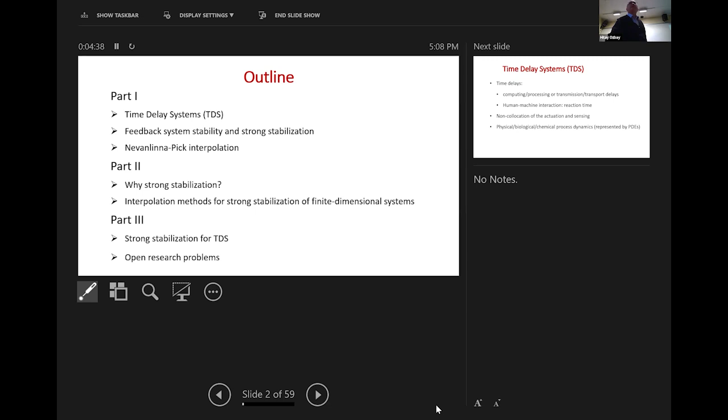Carry on. Okay, so I will talk about Nevanlinna-Pick interpolation, which has been used in the old days of robust control, and how it is used to solve stability and strong stabilization problems. In the second part, I will motivate the strong stabilization problem, and then illustrate interpolation methods for that. In part three, we'll solve the main problem, time delay systems strong stabilization. I'll end with some open research problems that are related.

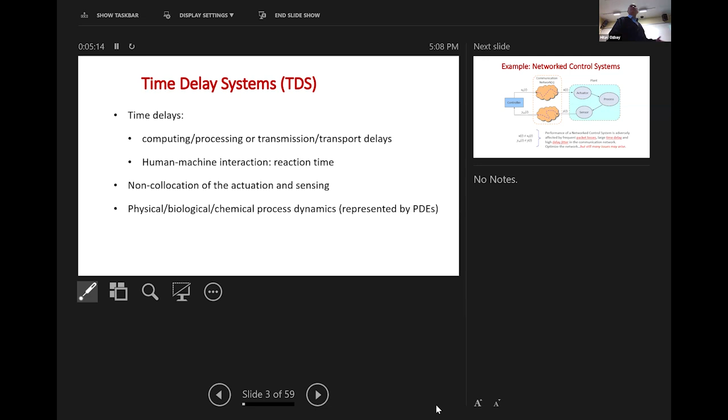Time delays are seen in the physical world all over the place. They come through processing delays, transmission delays, human-machine interaction where human reaction time is slow, and non-collocation of actuation and sensing in physical systems. They appear in many biological, chemical, and physical systems represented typically by partial differential equations.

One typical example is a networked control system, where you have a physical plant here which contains the process, actuator, and sensor, and far away there is a controller. The communication between these two is done through communication networks. So you send the command signal from the controller, and it gets to the physical system through the communication network. This signal U is not exactly equal to UC, and the simplest model of this transmission is a delay, a pure time delay.

There are, of course, other issues involved with communication networks. For example, there may be jitter in the delay, there may be packet losses, quantization, etc.

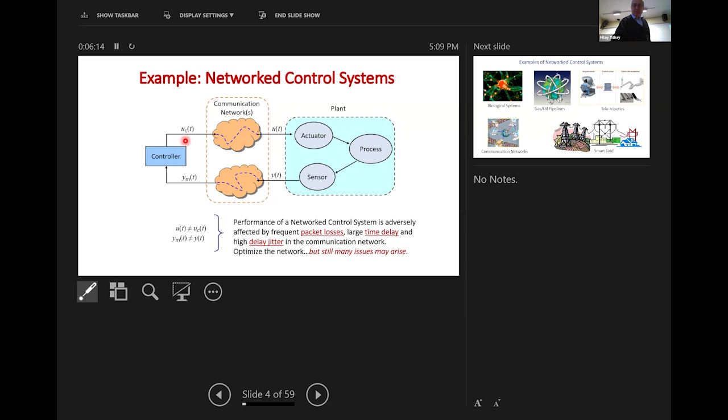Some network control system examples from different applications - I'm just going to skip this since you are all familiar with these kinds of things.

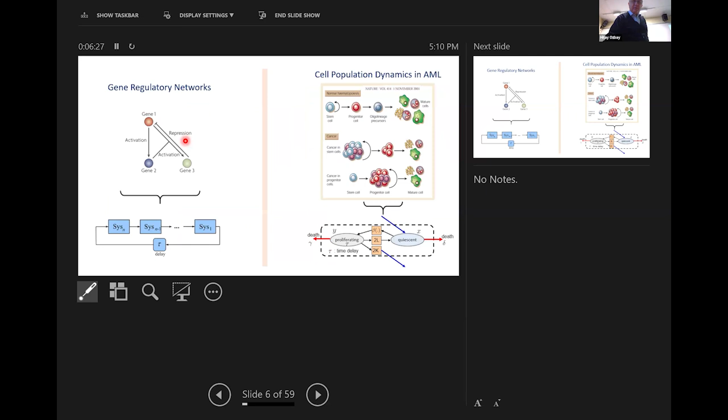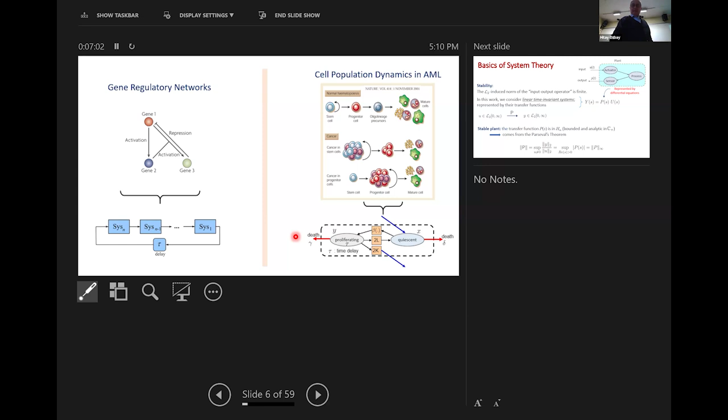Gene regulatory networks also contain time delays. If you model the cell population dynamics in leukemia, for example, there's a famous time delay system model for it. In fact, the very first original paper on biological cell population dynamics came out of McGill University. Mackey, I don't know if you know him, presented that. Okay, let's put everything into perspective.

What do I mean by a system and how do I represent the system? These are the very basics of systems and control theory. Let's say you have a plant. I assume that the plants we are dealing with are linear time invariant. Therefore, the input-output relationship can be represented by the transfer function.

Stability, I define it to be L2 norm, L2 induced norm, boundedness of the L2 induced norm. That brings us to H infinity stability: the transfer function for a system to be stable must be in H infinity - bounded analytic functions in the right half plane. The operator norm is the H infinity norm, actually. In particular, this means that the plant should not have poles in the right half plane.

But if you have time delay systems, infinitely many poles appear, and there are some other technical details.

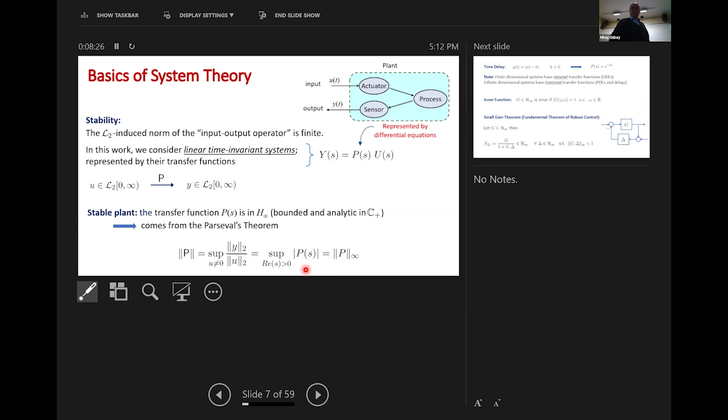So, time delay: if your output is just a constant delayed version of the input, the transfer function is e to the minus hs, by the Laplace transform property. So in this case, you see that an irrational transfer function appears. For finite dimensional systems, the transfer functions are rational - you have finitely many poles and zeros. For infinite dimensional systems, you may have infinitely many poles and zeros.

Throughout the talk, I will mention something called an inner function. We say that a stable transfer function - stability in the sense of H infinity - is inner if its magnitude on the imaginary axis is 1 almost everywhere. Then there is another thing which I use later on, the small gain theorem.

George is looking at us.

He's checking. His picture is over there.

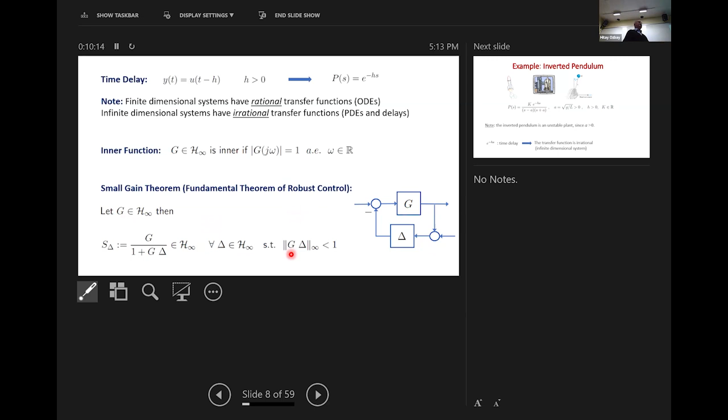So if you have a feedback connection like this, where G is stable and delta is stable, then this feedback connection is stable for all delta stable, such that the infinity norm of G times delta is less than 1. That's called the small gain theorem.

Okay, example of an infinite dimensional or time delay system transfer function: you're trying to balance a stick in your hand. So let's take something here, this one. You're balancing this. What you do is you look with your eyes where the current position is, you get feedback from it, then process it in your brain, and do actuation through your hand.

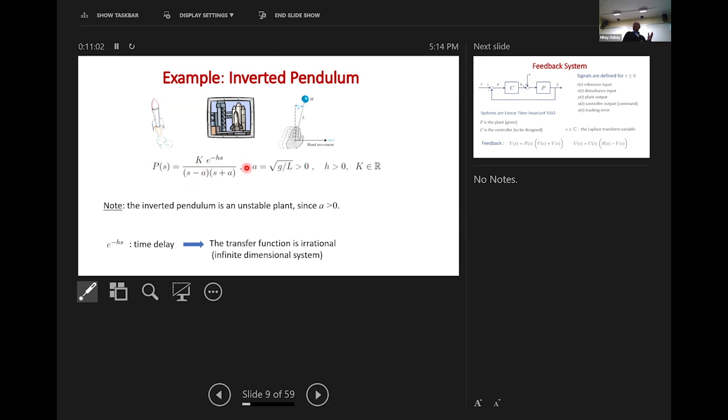So human reaction time is the delay, and the rest is the physical property of an inverted pendulum. It's an unstable system because it has a pole in the right half plane.

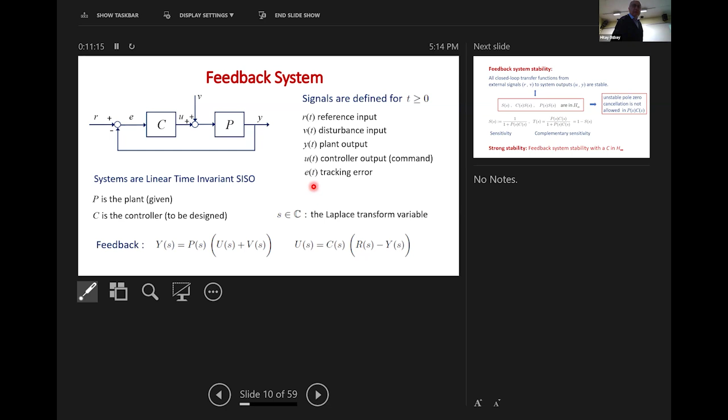Okay, so I already talked about the feedback system connection, but again, stability of the feedback system is equivalent to having all three transfer functions in H infinity: sensitivity, controller times sensitivity, and plant times sensitivity. Obviously, when sensitivity is stable, then 1 minus sensitivity is the complementary sensitivity, so that's the transfer function classically from reference to output, and it's already stable. But you also need controller times sensitivity and plant times sensitivity in H infinity, because if one of them is unstable, then one of the transfer functions will be unstable.

So that is feedback system stability: all transfer functions must be in H infinity. That's equivalent to having one of the transfer functions, let's say S, in H infinity, plus no unstable pole zero cancellation. Strong stability, which is the subject of today's talk, is feedback system stability using stable controllers only. That's the strong stability problem, and later on I will motivate why we are interested in this.

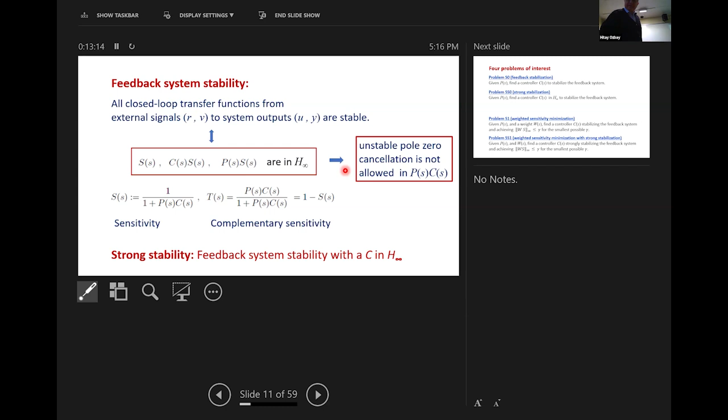So we have four problems of interest. One, S0, feedback system stability. The second problem is SS0, strong stabilization problem, which I have already defined. Then there is also a weighted sensitivity minimization problem, which is feedback system stability plus the H infinity norm minimization of the weighted sensitivity. And the associated strong version of this problem is weighted sensitivity minimization with strongly stabilizing controllers. So there are four problems that will be of interest to us later on.

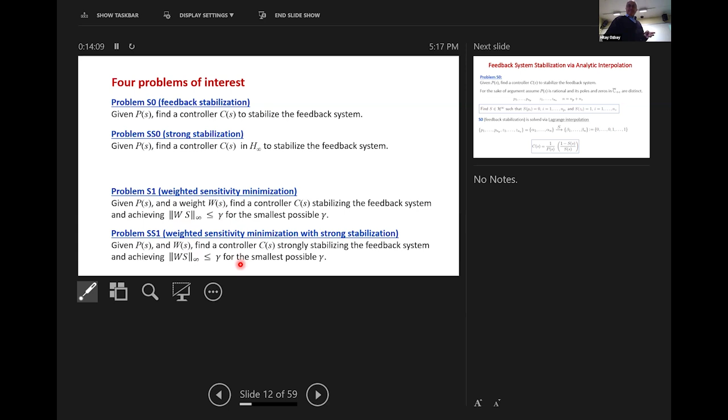So feedback system stabilization can be done by analytic interpolation. Let's say you have a given plant, and you want to find a controller to stabilize the feedback system. For the sake of argument, assume P is rational and its poles and zeros in the extended closed right half plane are given here, with total n poles and zeros, and assume they are distinct. Then feedback system stability is equivalent to finding a function S, the sensitivity function, which is stable, such that S takes certain values at the right half plane poles and zeros.

These interpolation conditions actually correspond to the no unstable pole zero cancellation condition in the plant times controller expression. Sensitivity becomes 0 at the unstable poles of the plant, and sensitivity becomes 1 at the unstable zeros of the plant, so there is no unstable pole zero cancellation. So basically this problem is equivalent to: given some points in the right half plane and their corresponding values, find a stable transfer function which does this job. This is the Lagrange interpolation problem, and it's relatively easy to solve.

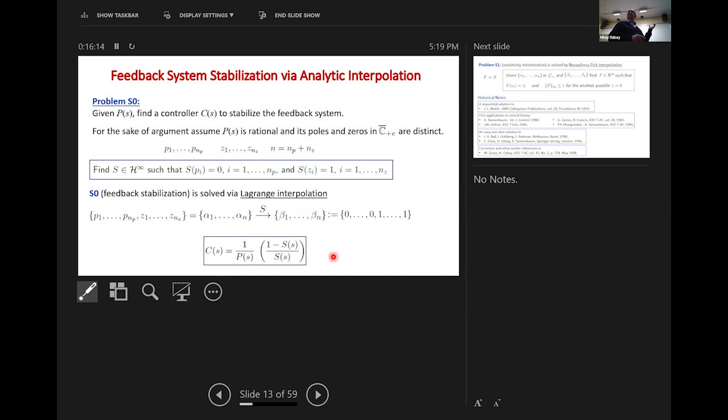Then you construct the controller from the sensitivity that you have constructed this way. This is something that appeared in the 1980s and was forgotten afterwards. This is not what people usually do.

Sensitivity minimization is equivalent to Nevanlinna-Pick interpolation. That is, you have some points in the right half plane and their corresponding values, and you need to find an interpolating function, stable, with the smallest H infinity norm possible.

Historically speaking, the Nevanlinna-Pick solution goes back to an algorithm which appears in Walsh's book. It's a sequential algorithm: you first find the first interpolating function, then use it for the second one and the third one, and so on and so forth, continuing like this. This algorithm has been used in robust control theory, first by my PhD advisor, Allen Tannenbaum, in 1980. Then Bill Helton used it in the circuit theory literature, and Zames and Francis used it to solve the H infinity control problem. And Khargonekar and Tannenbaum later used it to solve other stability margin optimization problems.

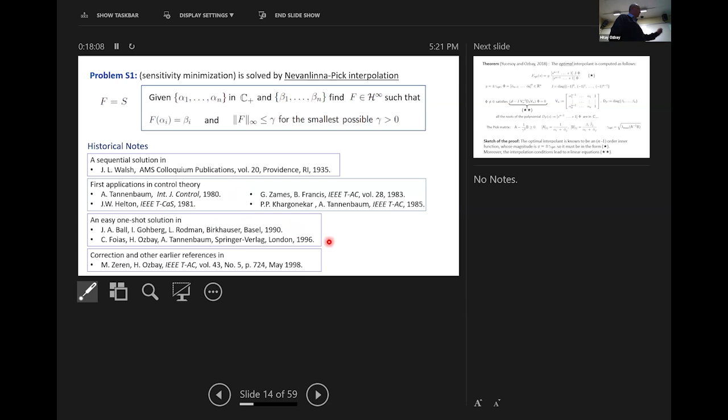But the simplest solution, in my point of view, for the optimal interpolant is in our paper here. I'm not going to spend much time on this, it's just that there exists a simple one-shot solution. So optimal interpolant is an inner function which can be constructed by finding the eigenvalues and eigenvectors of a certain matrix here, this matrix, okay? Let me skip this.

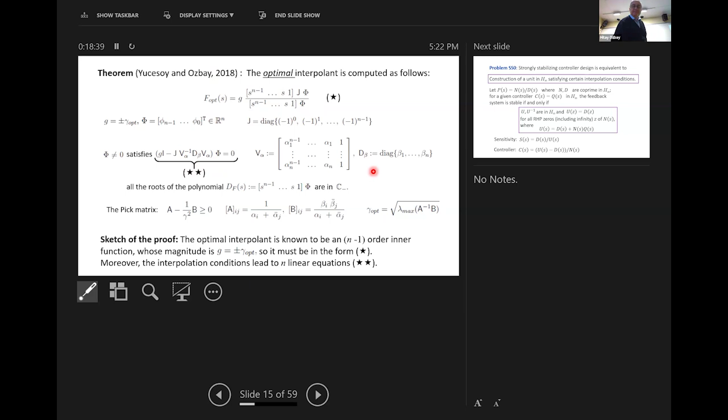Now, so far, problem S0 and S1. So stability and sensitivity minimization we discussed. Now, how about strong stability? Strong stability is equivalent to construction of a unit in H infinity which satisfies certain interpolation conditions. Now, what do I mean by a unit in H infinity? U is a unit in H infinity if it is in H infinity and its inverse is also in H infinity.

Okay, so if we can start with a coprime factorization of the plant in this form, n over d, where n and d are coprime in H infinity, and assume that the controller is Q in H infinity, then the feedback system is stable if and only if this U is a unit in H infinity. And this U, you see when n becomes 0 at a point z, let's say, then U must be equal to d of z. So these are the interpolation conditions for the unit construction, okay? So in this case, once you've constructed such a U, the sensitivity function is this, and the controller is written in this form, okay?

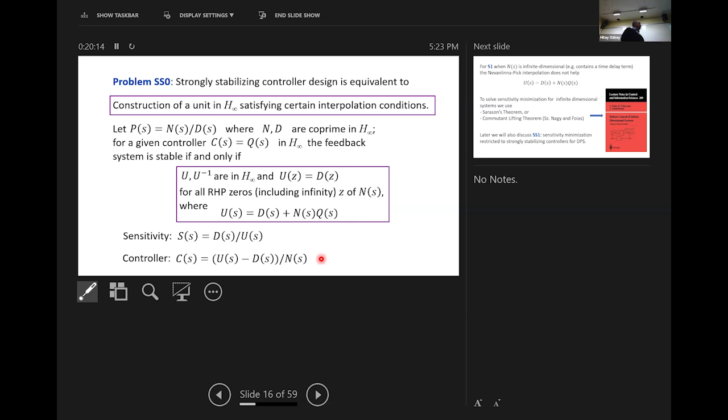One other thing I should mention for the sensitivity minimization problem: when the plant is infinite dimensional, when n contains delays, for example, Nevanlinna-Pick interpolation is not really helpful. So you have to go to other extensions of the interpolations. And for the sensitivity minimization for strongly stabilizing controllers, we'll come to this problem later.

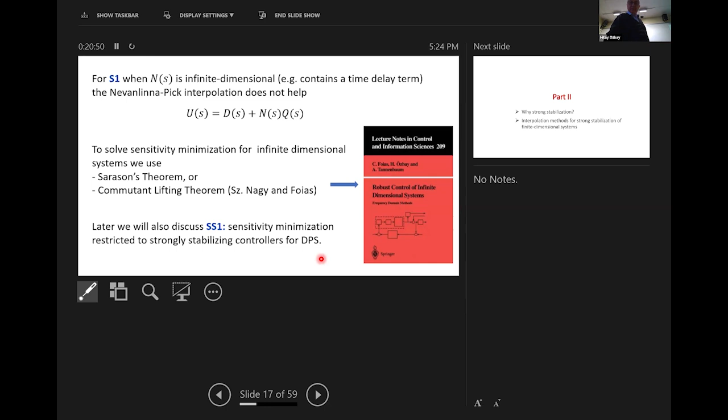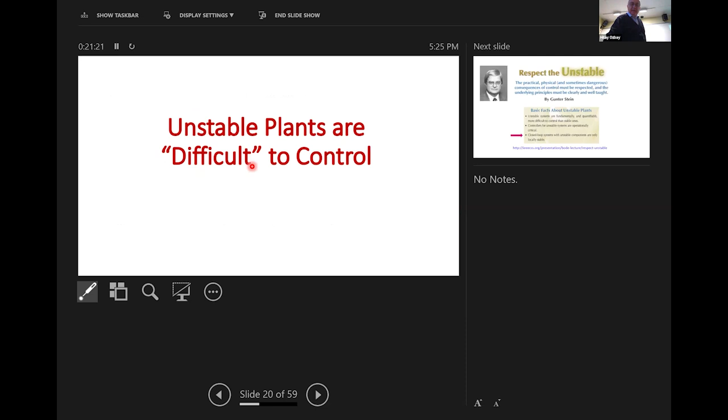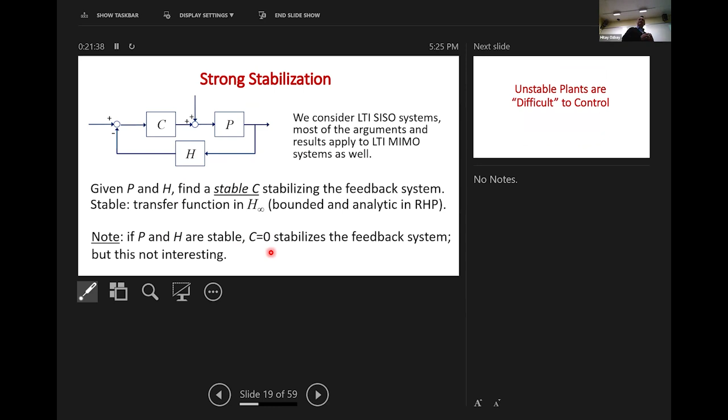Okay, so one important thing is that unstable plants are difficult to control. So if P and H are stable, then choosing C equal to 0 stabilizes the feedback system, but obviously this is trivial and it's not interesting. So the strong stabilization problem becomes more interesting for unstable systems, and unstable systems are difficult to control.

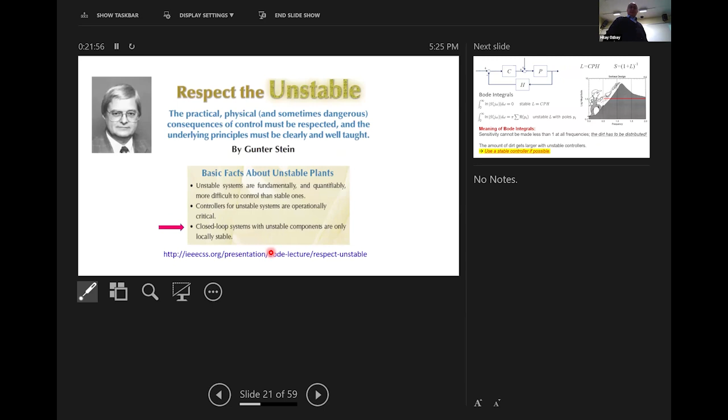So this is the very famous Bode lecture given by Gunter Stein in 1989. And he argues there, using Bode's integral properties, say integral formulas, that if the open loop plant transfer function contains right half plane poles, then what can be achieved in the sensitivity gets worse, okay? So for this reason, you don't want to introduce extra right half plane poles in the open loop transfer function. So use a stable controller if possible.

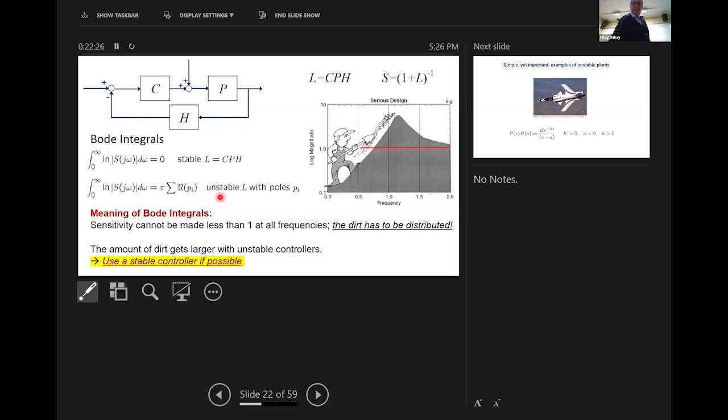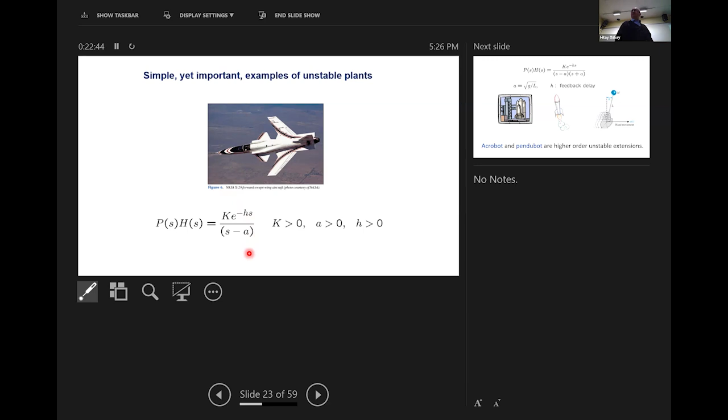Simple yet important examples of unstable systems are like the one shown here, which is an abstract model of an experimental X-29 aircraft. An example I mentioned before, but you also have other interesting problems. If you have two links like this, and then you try to stabilize, that's an acrobot problem. So they have two unstable poles and delays.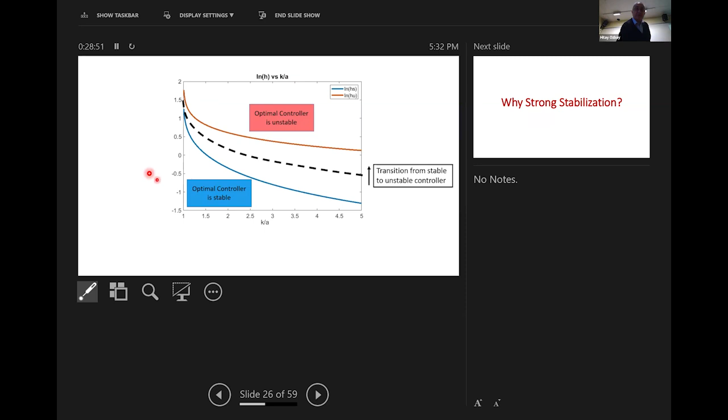And just a clarification here, the result in this plot - is this a feature of time delay? This would happen even without time delay. No, this is a function of time delay. You see this y-axis is the time delay, and x-axis is k over a, so how aggressive you are in your design.

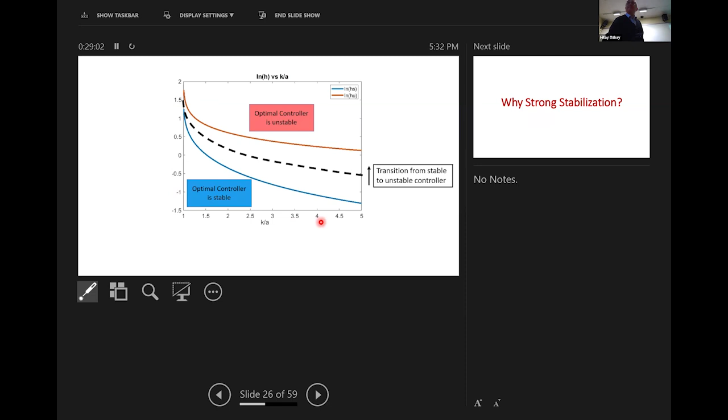Okay, so these are two reasons. And the third reason, which is also very compelling to use stable controllers, is that let's say your sensor is a network here. The output goes to the controller side through a network, and somebody is messing up your network - let's say there's a malicious attack that takes out the network. And suddenly you don't get anything in the measurement signal. So then your system operates in open loop. If you have an unstable controller, the open loop system is unstable, and then you are doomed, right? So that's another important point.

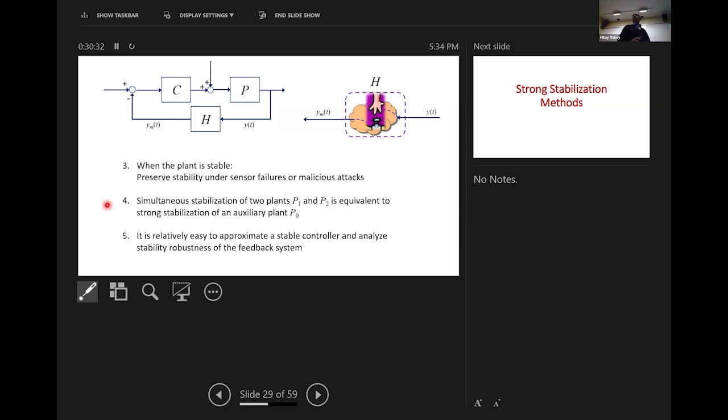And the fourth reason is that simultaneous stabilization of two systems is equivalent to strong stabilization of an auxiliary system. So that's also important. If you have a system where there are two possibilities for your actual physical system, and you want to stabilize both of them, but these are two discrete plants, you do a strong stabilization for an auxiliary plant. Also, when you have a stable controller, it's relatively easy to approximate it. So that's another thing.

Strong stabilization methods - okay, let's talk a little bit about that. So we already know how to stabilize a given plant, right? If you have an nth order plant, you do observer plus state feedback, let's say, and you get at most an nth order stabilizing controller. That's relatively easy. Or you can do Lagrange interpolation, you can again get the same.

But for strong stabilization, you need an extra condition to be able to solve this problem. The extra condition is given by the Youla, Bongiorno and Lu result, which is the parity interlacing property: for every pair of positive real axis zeros, you must have an even number of poles. And the proof is not very difficult to see. When you construct a unit - anyway, let's not go into the proof - but if this number is odd, it means the unit must change sign on the positive real axis, meaning it must have a zero on the real axis, and its inverse is not stable.

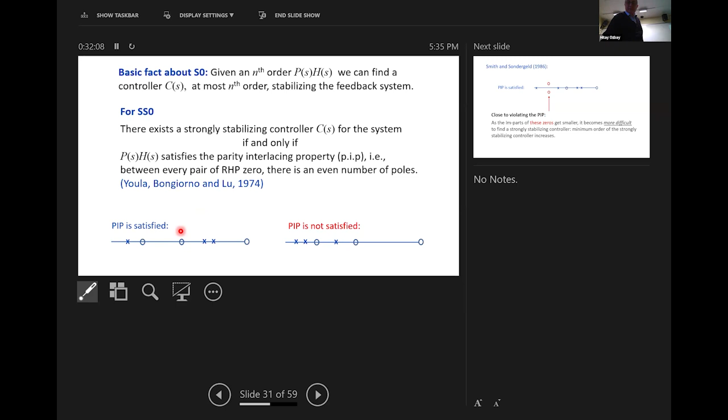On the other hand, the other difficulty is the following: even if the plant satisfies the parity interlacing property, you can find a strongly stabilizing controller theoretically speaking, but there may be some situations depending on the pole zero location. So location now plays an important role, not just the number of pole zeros.

The strongly stabilizing controller order may be extremely high. For example, in this configuration, there are complex conjugate zeros, and as the imaginary part goes to zero, the order of the strongly stabilizing controller goes to infinity. As you can see, when they hit the real axis, the parity interlacing property is being violated, because there will be like one pole. So there is a difficulty associated with this problem.

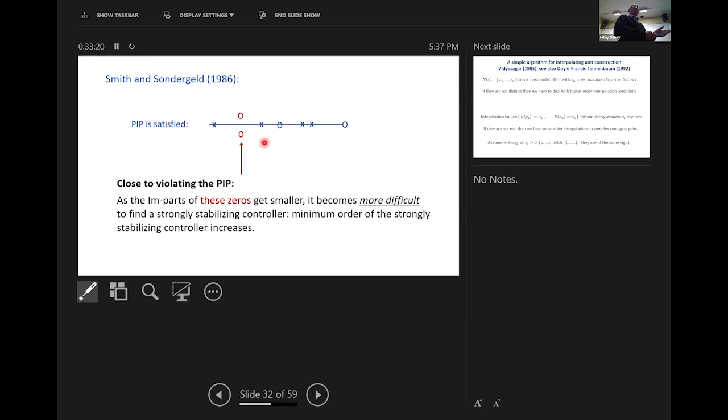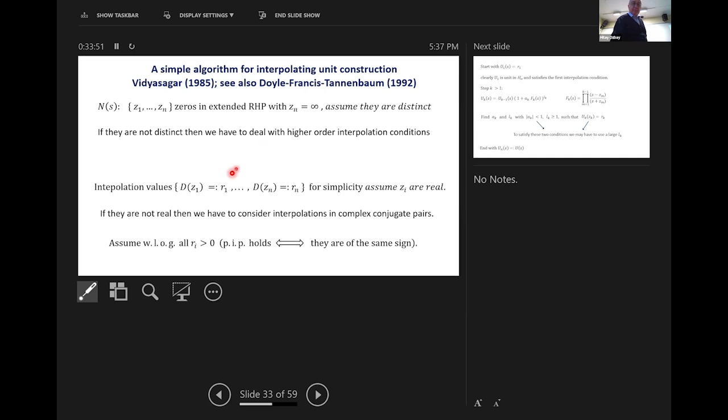One of the first algorithms was given by Youla and his colleagues. It is also repeated in Vidyasagar's book and Doyle, Francis, Tannenbaum's book. I'm not going to go over the technical details of this algorithm, but you try to construct a unit in H infinity from the interpolation conditions. They use the small gain theorem and a sequential way of constructing the interpolating function.

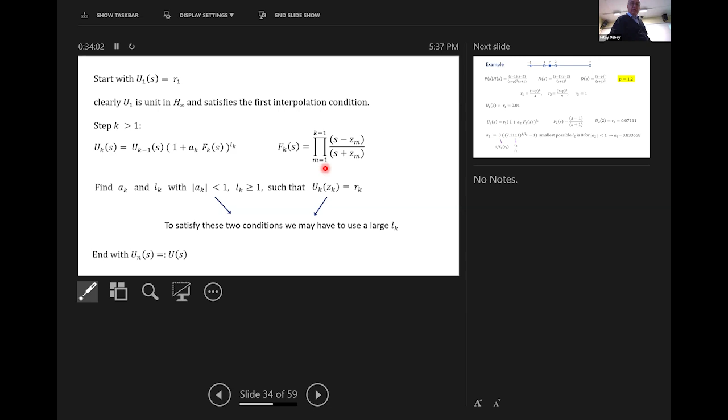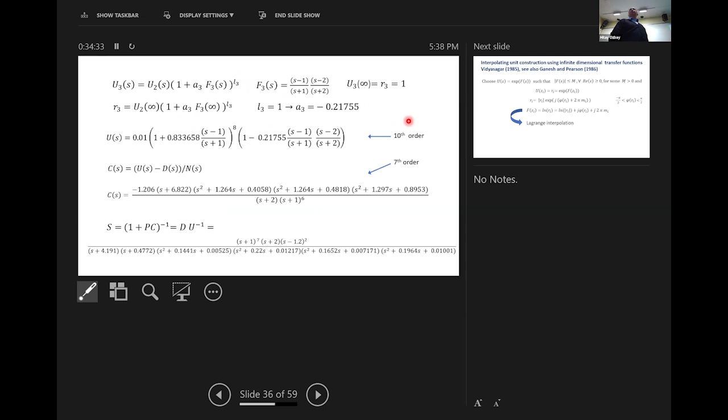So here's an example: a third order plant with a zero at 1 and 2, and also at infinity because this is strictly proper. The right half plane poles are between 1 and 2. For this value, p equal to 1.2, I follow the algorithm and you get a 7th order strongly stabilizing controller. So although you started with a third order plant, you have to go to 7th order to get the strongly stabilizing controller.

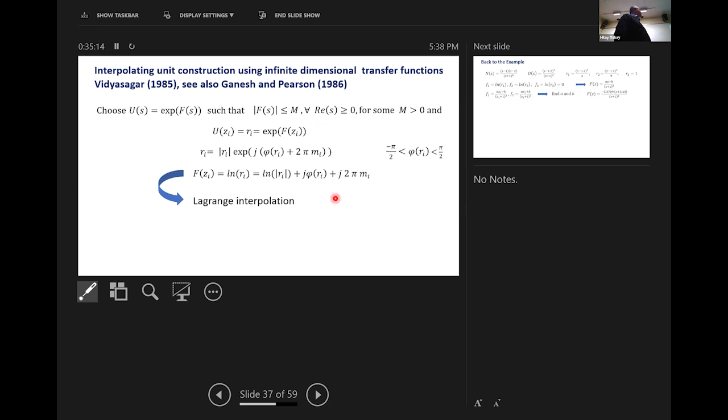And if you allow yourself infinite dimensional controllers, it's easier to solve this problem. So here it is: you can choose your unit as e to the f, where f is in H infinity and f is bounded in the right half plane. So the interpolation conditions lead to Lagrange interpolation for the construction of f.

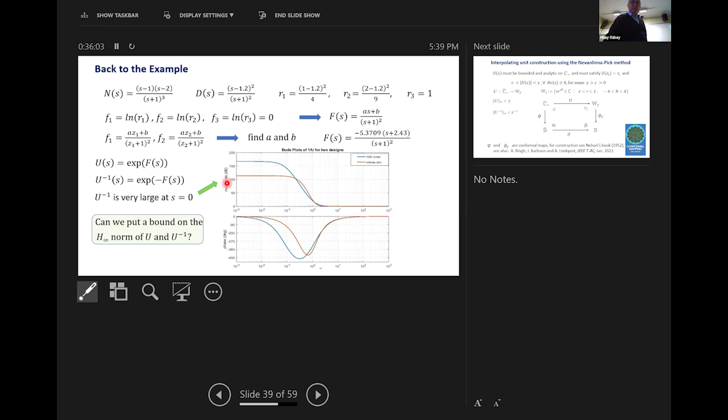Because we only put a bound on the magnitude of u, we did not put a lower bound on that. So you can actually put a lower bound on the magnitude of u, and that means you want your analytic function u to take certain specific values in the right half plane. So map this region, which is a simply connected domain, into the unit disk, map the right half plane to the unit disk, and you want to find an interpolating function from the closed unit disk to the unit disk, which is a Nevanlinna-Pick problem. Again, it can be solved.

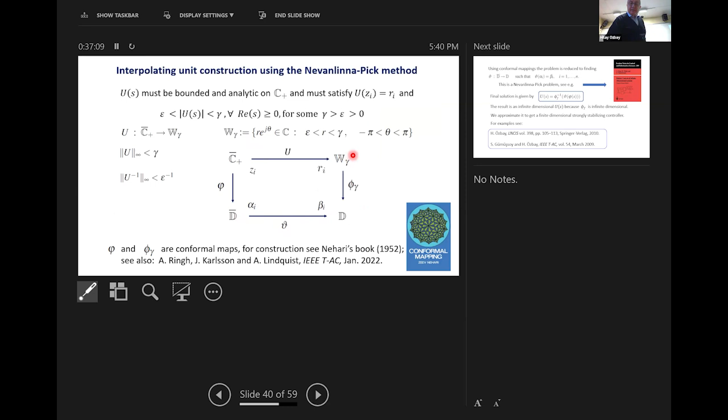But the problem here is finding the conformal map, this one. You can check in Nehari's book. But that map is infinite dimensional. So you are going to get a finite dimensional function here, but going to the other side, you will have an infinite dimensional function.

Now, one of the criticisms for the interpolating methods for controller design is that if I don't know these values exactly, so what happens? If there is a perturbation in the interpolation points, what happens?

So in that case, you look at this problem: let's say this is your true plant, your nominal plant is N over D, and the uncertainties are described by these numerator and denominator perturbations. Let's say W1 and W2 are known stable transfer functions. Their magnitudes on the imaginary axis will tell me how much confidence I have or how much uncertainty there is, and these are normalized to 1.

So you design a U starting from P0 equals N over D. You construct your strongly stabilizing controller that leads to S0 and T0. And if you look at the sensitivity function for the uncertain system with this C0, with this controller, it's this expression, and it is going to be stable by the small gain theorem if this norm is less than 1.

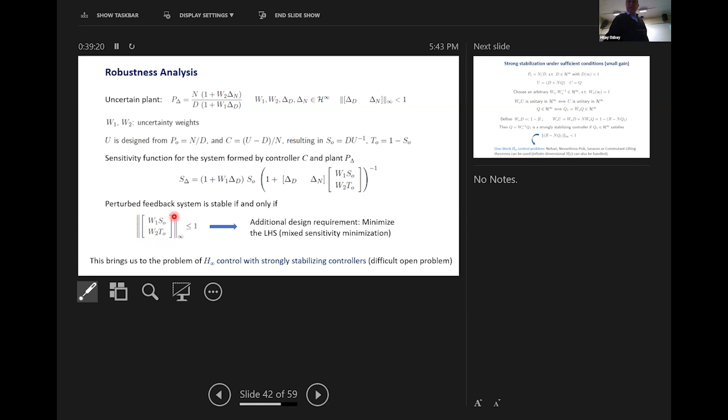There are some bounds for it, but not known. The other approach is strong stabilization under sufficient conditions.

So, P is N over D. Now let's restrict D to have 1 at infinity. I can always do this. This is a normalization, so the value of D at infinity is 1. And I want to construct a unit U in this form. So if I choose W0, an arbitrary unit in H infinity, such that its value at infinity is also 1, then W0 times U is unitary in H infinity if and only if U is unitary in H infinity.

So then let's look at W0 times U, which is this expression here. And it can be written as 1 minus R minus N times Q1, where Q1 is W0 times Q. And R here is 1 minus W0D.

So by the small gain theorem again, if I can find a Q1 such that this norm can be less than 1, then I solve the problem. That gives me my strongly stabilizing controller. But this is a sufficient condition only because I use the small gain theorem. The left-hand side, so this problem, minimizing the left-hand side, is a one-block H infinity problem. We know how to solve it, okay?

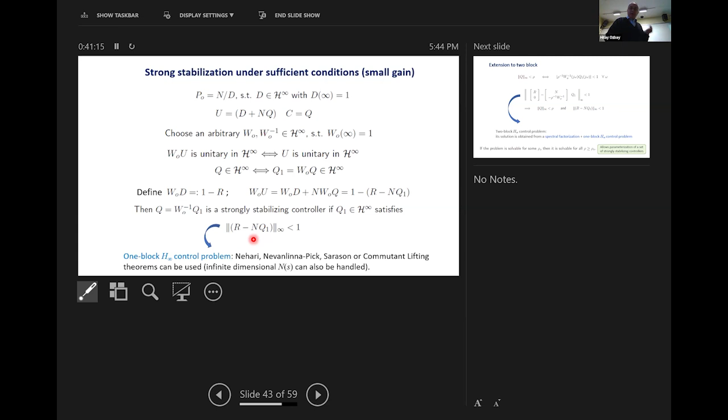Now, if you want to further impose a bound on the controller magnitude, so the controller must be stable, but also its infinity norm must be less than, let's say, rho. Combined with the previous condition, it gives me a two-block H infinity problem to solve. Again, we know how to solve this problem. And so what we are going to do, we will be interested in solving this problem for systems with time delays. I'll give examples of that.

Could you remark about the multivariable versions of this theory? Yeah, exactly. It works exactly the same way.

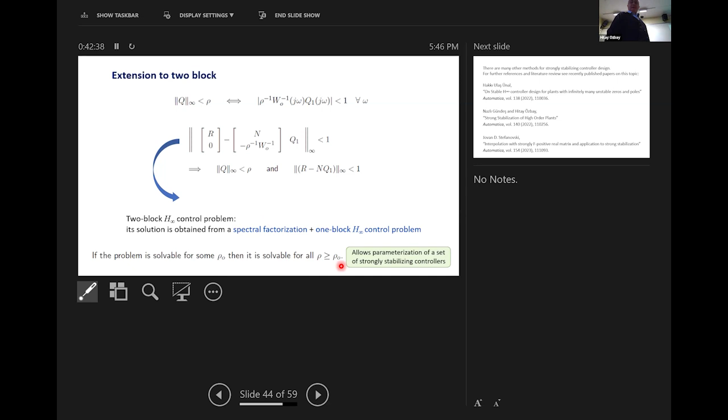Ah, okay, right here. So the original version, which I wrote with my former PhD student, was the multivariable version. I just wrote it in simplest terms here. So the other interesting thing here is that if the problem is solvable for some rho, say rho 0, then it is also solvable for rho greater than rho 0. So that allows us some kind of a parametrization for a set of strongly stabilizing controllers.

So there are other methods for strong stabilization, but I'm not going to talk about them. So, time delay systems. We are going to apply the techniques that we have seen to time delay systems in the remaining 10 minutes or so.

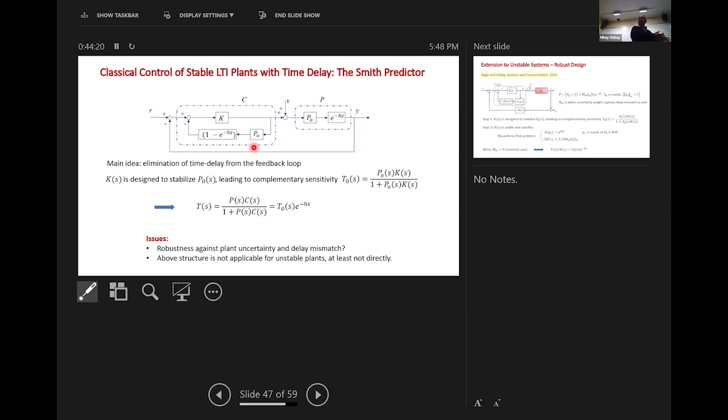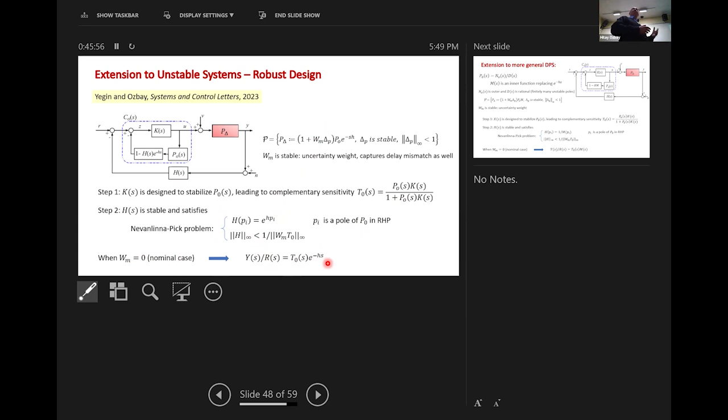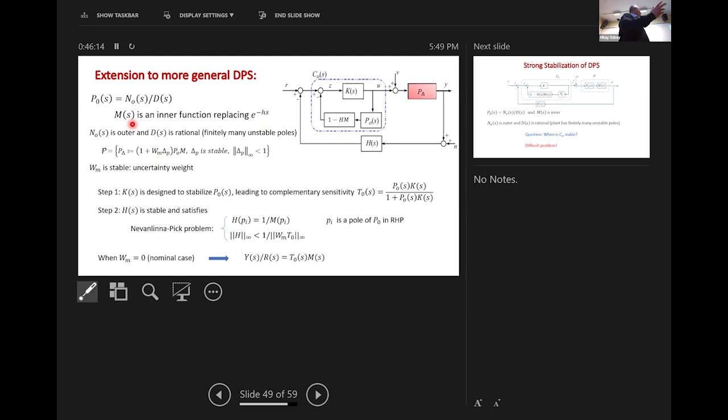So in the nominal case, when the uncertainty is 0, the transfer function you get from the reference to the output is again T0 times the delay, which is really the main idea of the Smith predictor. So that is the extension to unstable plants. More general distributed parameters can be handled in this way. Instead of delay, you can have an arbitrary function, but let's not go there. So this is a small extension of that.

So, okay, that was stabilization. How does it help? Does it help in strong stabilization? So for the strong stabilization, this C0 here has to be stable, because I know H is stable, so C0 must be. So when is this stable? Even when K is strongly stabilizing P0, that loop may not be stable. So that's a hard problem — it's one of the open problems.

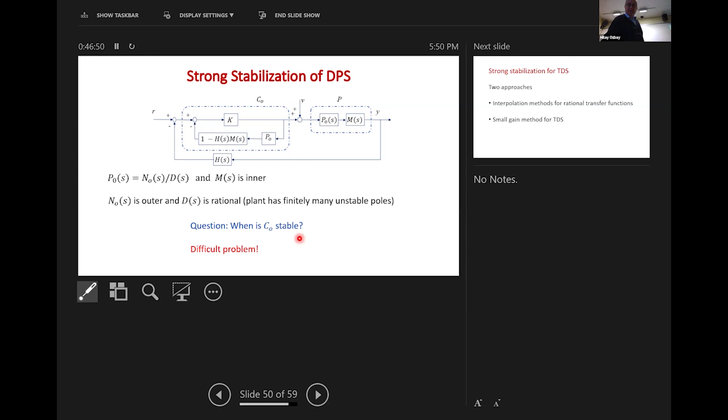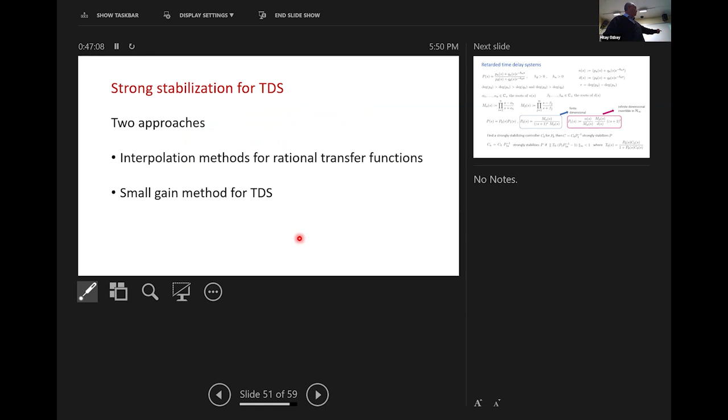The interpolation methods that I showed for rational transfer functions, for strong stabilization, also apply to time delay systems. I'm going to show just one example of that. And the small gain method also applies to time delay systems. I'll show you another example.

So the first example is interpolation methods. You can do a factorization of the plant. This is your plant, a quasi-polynomial divided by another quasi-polynomial. In order to find the right half plane poles and zeros, you have to find the roots of the numerator quasi-polynomial. So these are the roots, these are right half plane zeros, and these are right half plane poles, the roots there.

So in order to find the roots of quasi-polynomials, we use various software packages that exist now.

You can write the plant in this form, P0 times P1, where P0 is finite dimensional and P1 is infinite dimensional, but it is invertible in H infinity. So this part can be ignored essentially, because it can be inverted stably and put inside the controller. So you're only interested in strongly stabilizing this, and you can apply the interpolation method we have seen.

But if you approximate P1 in the controller implementation, then we also need another infinity norm bound condition for stability.

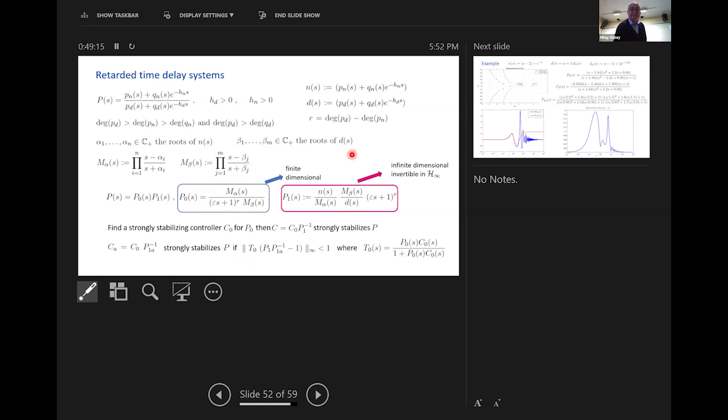So, small gain condition. I can apply the small gain condition that we have seen for time delay systems. In the previous example, our N was finite dimensional, but now for time delay systems, your N will be infinite dimensional. It will contain a time delay, okay?

So we will consider two problems here. SS0: given a plant, find a strongly stabilizing controller using this small gain theorem. And SS1: find a strongly stabilizing controller such that the weighted sensitivity is less than a specified value.

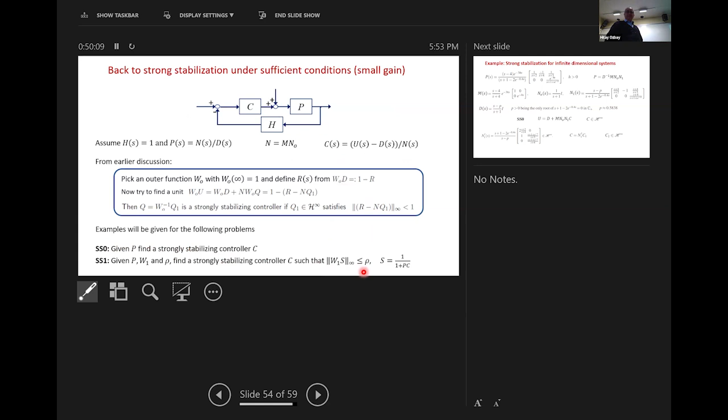So this is the example I take. You see here there is a parameter H. I'm going to leave this delay amount free, okay? So I'm going to see whether I can find a strongly stabilizing controller using the small gain technique for the values of H that are given, for which values of H I can find this solution.

And the one block problem that you get out of it now becomes this. By the way, maybe I should go back and talk about this little p. Little p is the only root of the denominator here in the right half plane, and it is 0.58. So the plant satisfies the parity interlacing property, because this is to the left of the zero, which is 4. And the other zero is at infinity.

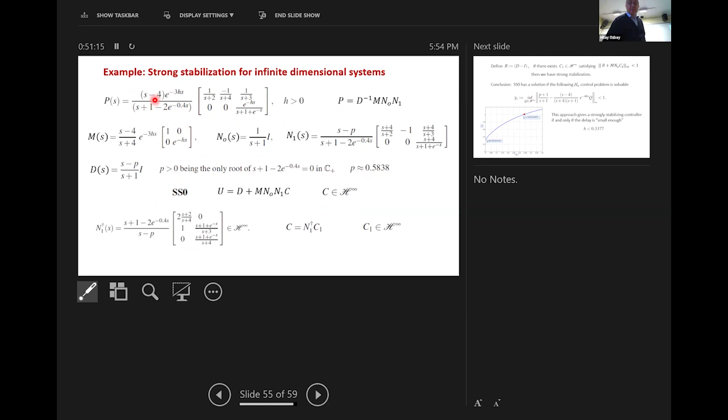So PIP is satisfied. And then you need to check whether this is less than 1 or not for the specific values of the delay, okay? And it turns out that this function gamma 0, depending on H, hits 1 exactly at H equal to 0.3377, okay?

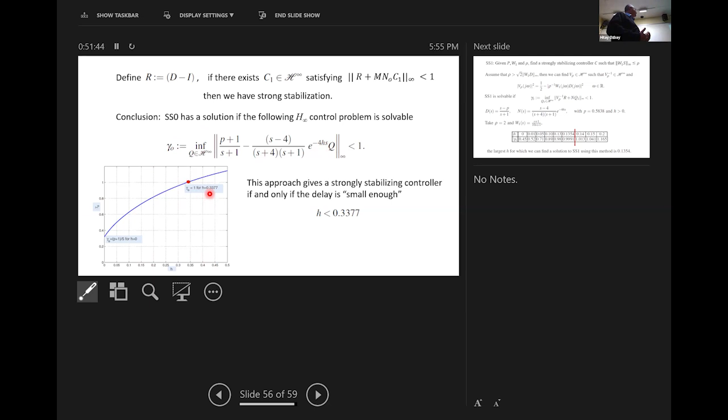Now the next question we ask is, let's say I give a rho, let's take rho equal to 2, okay? And weight W1 equal to S plus 1 over 10S plus 1. Can we find a strongly stabilizing controller such that this condition is satisfied?

And I apply the procedure again, the one block problem. It turns out that the one block problem is solvable for the values of H that are less than 0.13. So this is obviously an extra condition, it restricts the values of the delay that you can use. Previously it was 0.3377, now it is down to 0.1354. Again, this technique is sufficient condition based only.

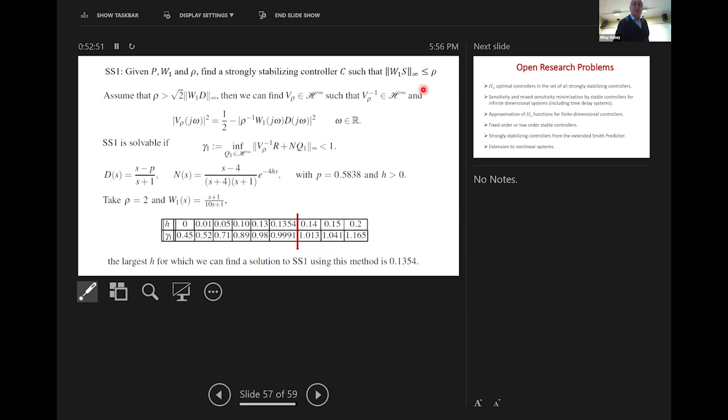I don't even know, for example, it may be possible to have the same condition satisfied for higher values of H, but using a different technique, okay?

So the open research problems in this setting are: H infinity optimal controllers restricted to small gain — that was strong stabilization, sorry. Approximation of H infinity functions using finite dimensional approximations, or fixed order low order stable controllers. So these are all unsolved problems.

Strong stabilizing controller from the extended Smith predictor — I don't know how to do that at this moment. And then you can also talk about extension to nonlinear systems. For example, Hammerstein-Wiener type of nonlinearities, I think can be handled in this setting.